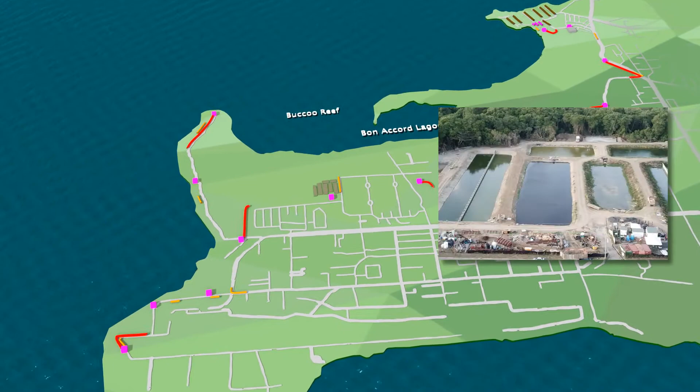Not only is the southwest area of Tobago a popular and scenic area for tourists and locals alike, but the region is also home to the Buccoo Reef and Bon Accord Lagoons, which are of tremendous ecological importance to the island. The new wastewater system was designed by Alpha Engineering and Designs 2012 Limited to have minimal impact on the surrounding environment. In fact, the two wastewater treatment sites at Bon Accord and Samaan Grove continue to boast a healthy bird population, attracting bird enthusiasts from across the globe.

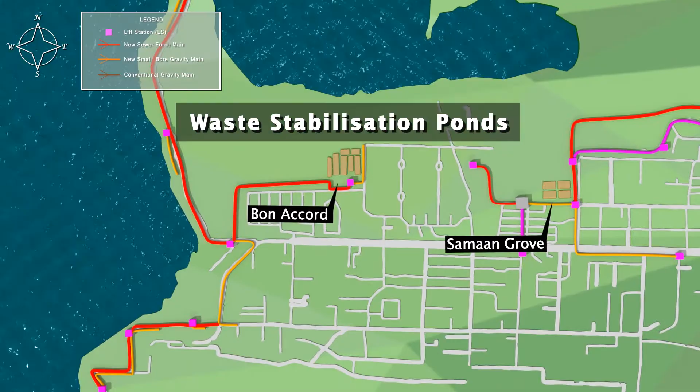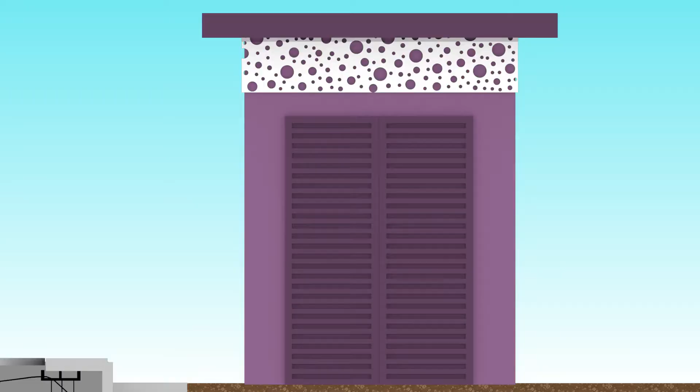The collection system consists of a network of small bore and conventional sewer lines, transmitting wastewater flows to two large treatment systems, known as waste stabilization ponds, located in Bon Accord and Samaan Grove. As part of this design, on-lot septic tanks remove solids and grease from the raw wastewater before entering the small bore lines. Gravity-fed sewer pipelines then take the wastewater to lift stations strategically placed across the network. These lift stations ensure that wastewater flow is maintained along the collection route in a controlled and constant manner.

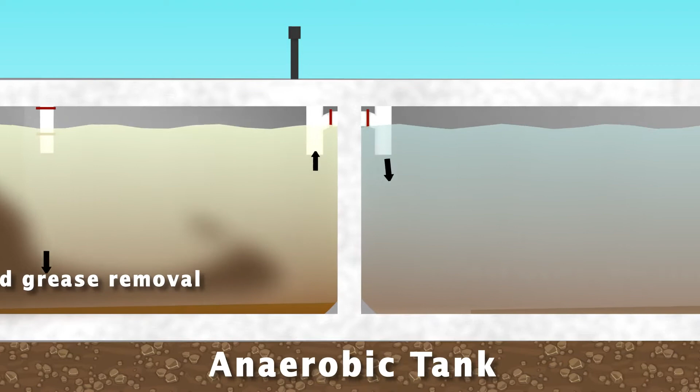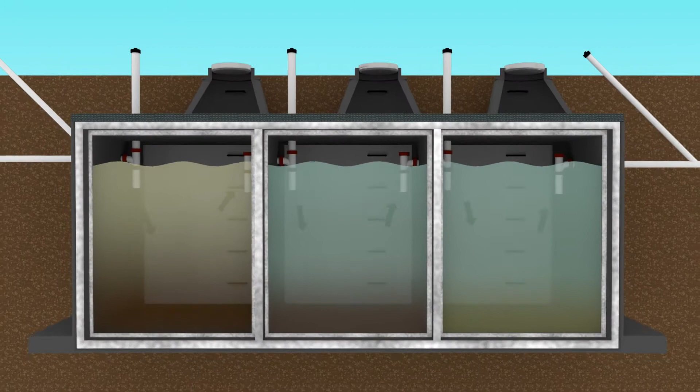The Bon Accord system starts along Lighthouse Road and continues collecting wastewater from properties in the Crown Point, Pigeon Point and Bon Accord areas. On the other hand, the Samaan Grove system collects wastewater from Buccoo Village, Coral Gardens, Golden Grove and Milford Court. Where on-lot systems were not available, larger conventional sewer lines collect and transmit wastewater to large anaerobic tanks, which remove the solids and grease. After treatment, the effluent then joins the small bore collection system. Smaller anaerobic tanks are also used to pre-treat high-strength wastewater from fish processing facilities in Buccoo and Bon Accord before transmitting to the waste stabilization ponds for secondary and tertiary treatment.

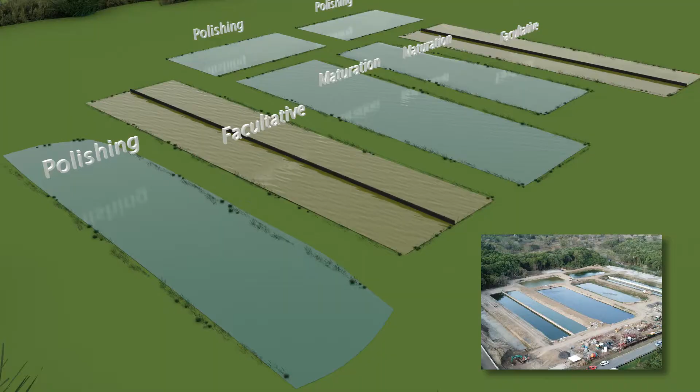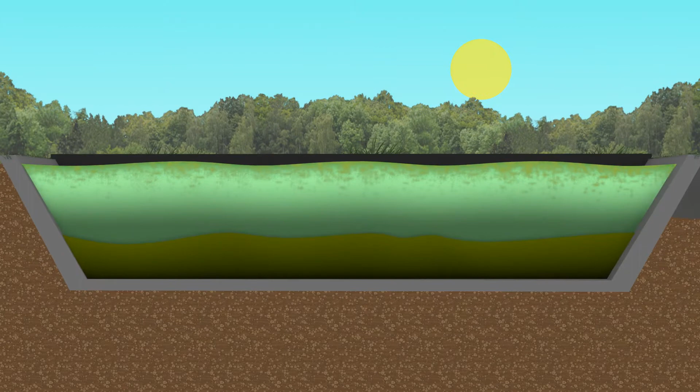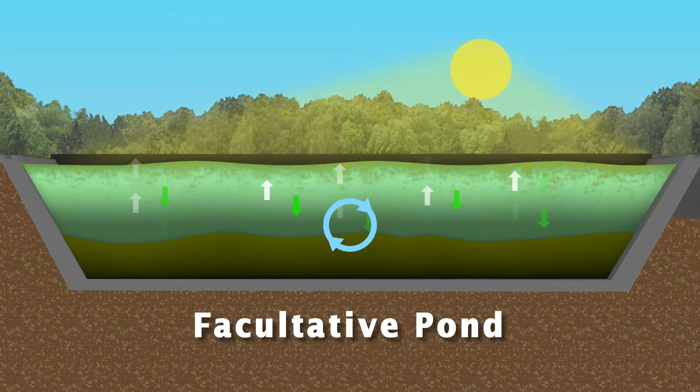At the waste stabilization site, wastewater is first pumped into the facultative ponds, which are specially designed to promote the removal of organics. The presence of organics seriously compromises water quality and is therefore one of the main processes in wastewater treatment. Treatment occurs via two biological treatment zones, an aerobic layer at the surface and an anaerobic layer below. The process relies on a delicate balance. Closer to the surface, the algae provides the vital oxygen source for respiration by the bacteria, allowing the breakdown of organic matter. In turn, deeper below, the organic matter produces carbon dioxide for the algae. This symbiotic relationship between the algae and the bacteria provides the basis for this natural method of wastewater treatment.

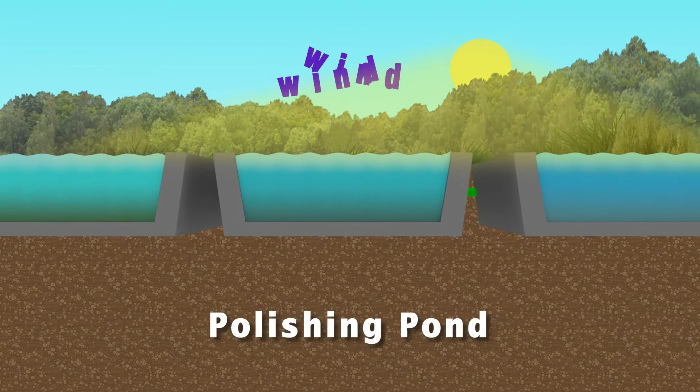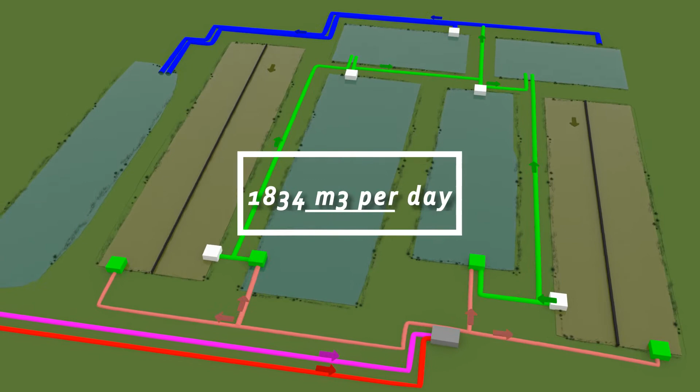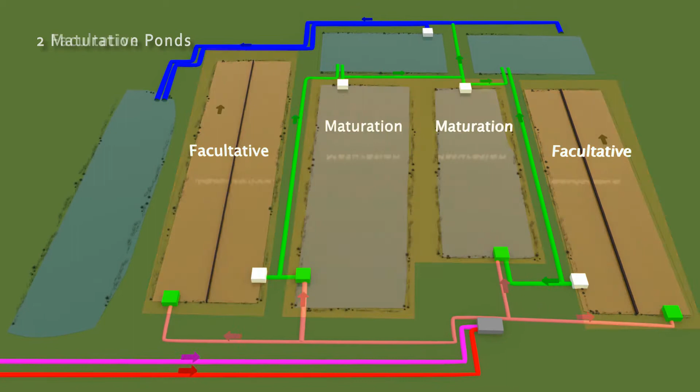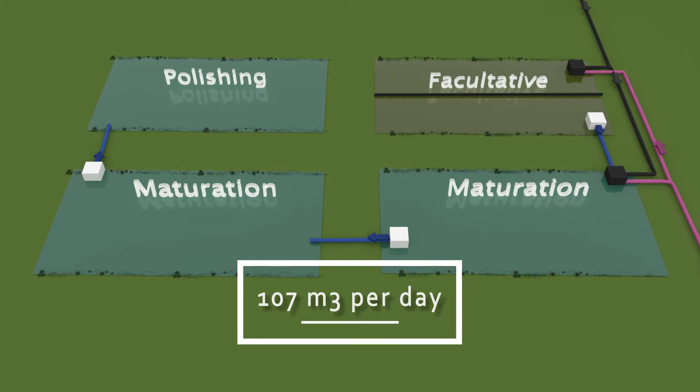The effluent from these ponds is then channeled to a series of shallower maturation and polishing ponds, which use sunlight and natural aerobic processes to destroy harmful bacteria such as fecal coliform. The Bon Accord waste stabilization ponds were upgraded to handle a capacity of 1,834 cubic meters per day, or approximately 4 times the original capacity. It consists of 2 facultative ponds, 2 maturation ponds, and 3 polishing ponds. The stabilization ponds at the Samaan Grove plant originally had a capacity of 107 cubic meters per day, which has been upgraded to handle 1,666 cubic meters per day. The final effluent exits the facility into collection drains, where it is released into naturally occurring wetlands.

The completion of the Southwest Tobago Wastewater Development Project is of great significance to the island of Tobago. The system utilizes a sustainable and eco-friendly solution to wastewater treatment, fulfilling the primary objectives of protecting human health, water resources, and the coastal waters surrounding the island. These environmentally sensitive areas are critical to the tourism and fishing industries. The system will also provide much-needed protection to the marine life, mangroves, and coral reefs that inhabit the coastal area.